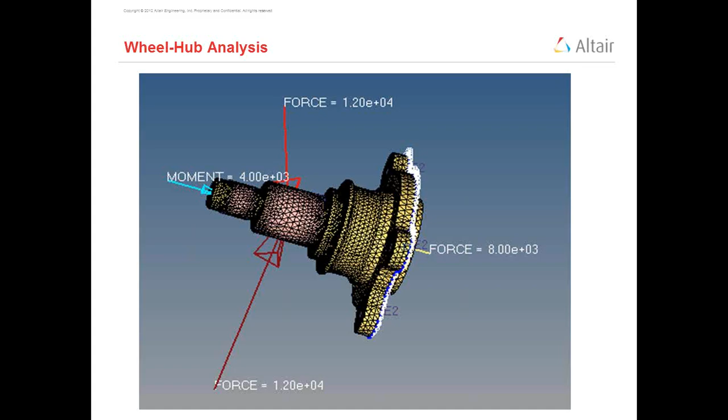We'll follow the same process as knuckle for the static analysis of the wheel hub. That is, first we create material, then property of the 3D elements, then we create a component collector and update it with the proper property, then we create load collectors as forces, torque and constraint, then we define the type of analysis. Here we'll use linear static.

So we'll start by opening the Hypermesh GUI from the start pull-down menu, all programs, select Hypermesh. This will open Hypermesh.

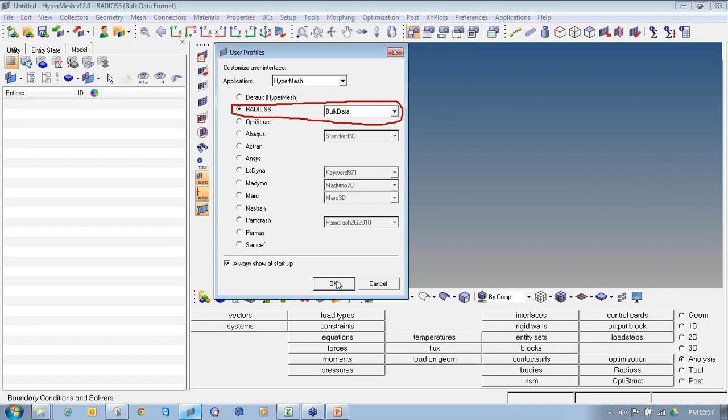Once you open Hypermesh, from the preferences pull-down menu, go to user profile and select the appropriate user profile to perform the static analysis. For the static analysis, always make sure you have selected RADIOSS bulk data to get the proper cards and properties, and click OK.

Then click on open folder. Before that, make sure on the top you've selected RADIOSS bulk data, so the proper bulk data format has been uploaded. Once that's done, click on open folder to open the file.

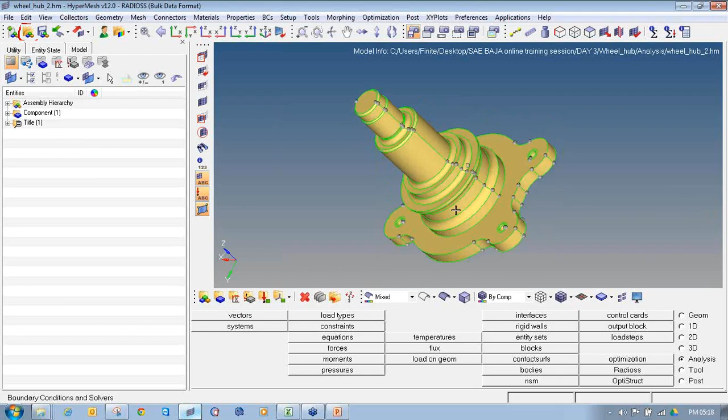From the model browser you can change the color also. So this is the wheel hub geometry.

First I will start with the geometry editing, as we have discussed earlier, so that it will automatically convert to a 3D mesh.

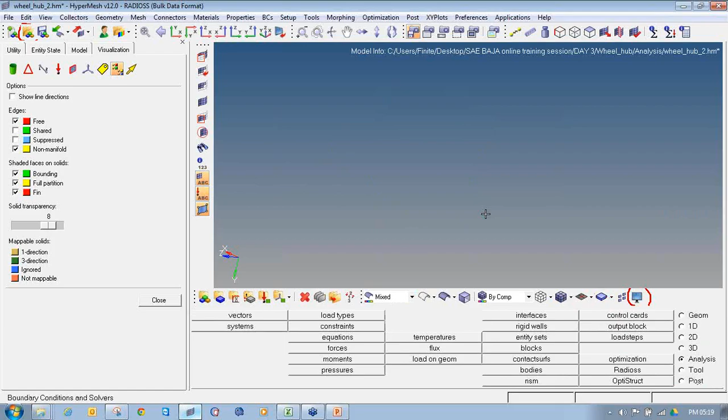Click on the visualization icon to enter the geometry editing panel. Then turn off the shared and suppressed edges and switch to line mode to check whether you have any free edges or non-manifold edges on your geometry. As you can see, I don't have any free or non-manifold edges on my geometry, so it's perfectly fine for meshing.

For the geometry editing, you can refer to the knuckle analysis model, which will help you with the geometry editing. The same way, you have to edit the geometry and remove the solids.

Either you can take a complete solid model or a surface model. If you are taking a surface model, it has to be an enclosed volume with all green or blue edges. If there is any T-connection, then yellow edges are okay; otherwise, you have to remove the yellow colored edges also.

Always make sure you do not set the geometry color to red, green, blue or yellow, because these are the colors used to indicate edge types. If you do, you won't be able to see the color coding of those edges. So if the geometry color is something like white, or if it's currently red, you can change it to a different color from the visualization panel. You don't have to keep it as one of these colors.

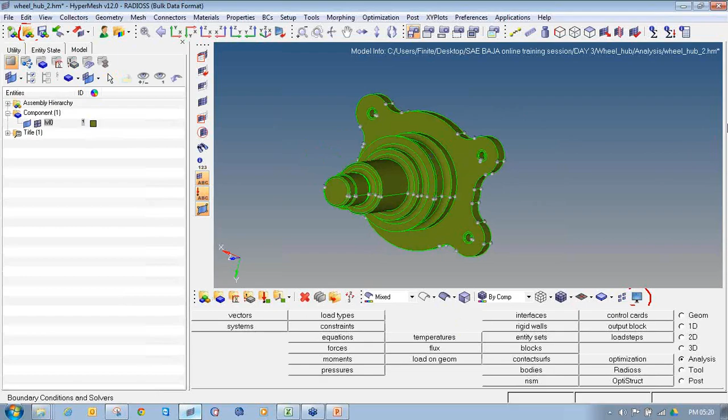Now I will enter the 3D tetramesh panel to generate a 3D tetra mesh for this wheel hub. So I'll go to 3D tetramesh and, in the tetramesh panel, select the volume tetra radio button.

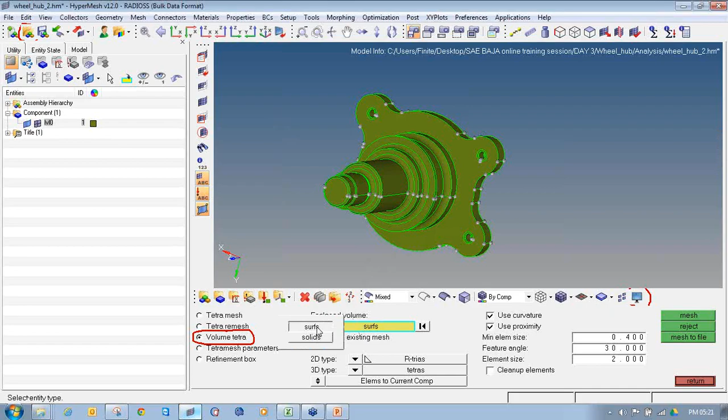In the enclosed volume option, select surfaces from the drop box. If your geometry is a completely enclosed volume, it will pick all the surfaces automatically, as you can see it has picked all the surfaces automatically.

Select the 2D type as trias, 3D type as tetra, and set elements to the current component. Right-click on this and make it the current component. You can also rename it if it's coming in as something like M0 due to CAD importing; since we have a wheel hub, I will rename it as wheel hub, and make sure that this is the current component.

Check the box for use curvature and use proximity, so it will capture all the fillets and sharp deviations of the surfaces and generate a good mesh pattern for the 3D elements.

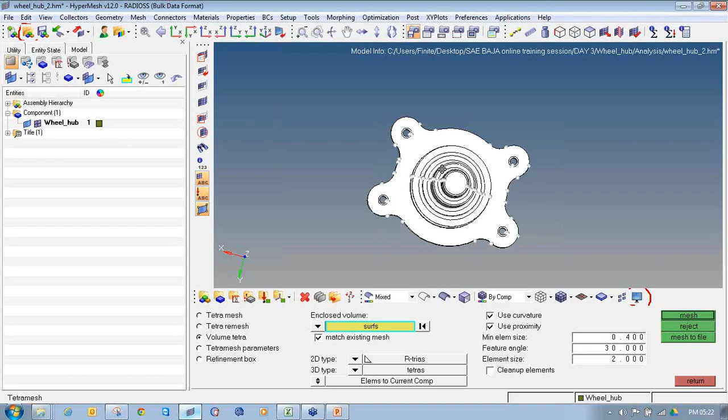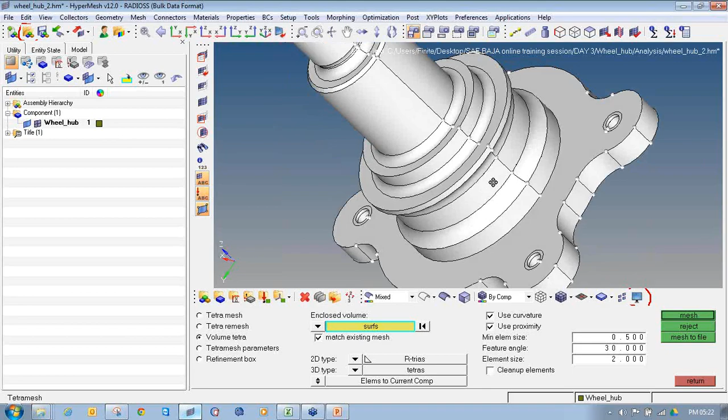Enter the minimum element size as 0.5 and average element size as 2, and enter the feature angle as 30. Feature angle stands for the angle between the normals of the two elements. It helps to create or capture curved regions of your geometry more accurately. Then click on mesh. Once you click on mesh, it will start the process. You can see on the bottom that it has started the mesh processing.

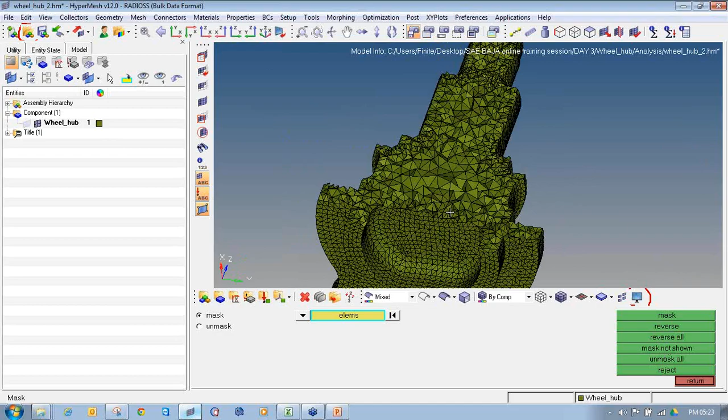So now you can see my wheel hub has been meshed by 3D elements. I will turn off the surfaces from the component, mask a portion of it and check how it meshes the wheel hub. You can see here it has meshed the wheel hub completely filled. If I click reverse, this is the second half portion. It has completely filled my wheel hub with 3D tetra elements. So I'll then click on unmask all.

Then my next step is to check the elements quality. I will click return to exit the tetra mesh panel, and click on the tools page and select check elements, or you can directly press F10 from your keyboard to enter the check elements panel. F10 is the shortcut for check elements.

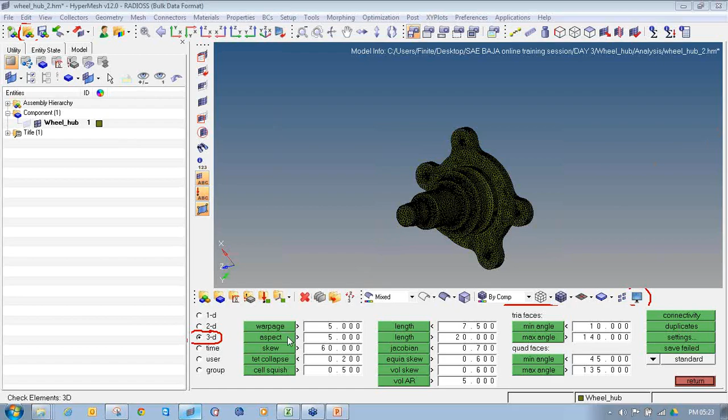Select the radio button as 3D because these are the 3D elements, so we'll check the elements quality for 3D. For 3D, we'll check aspect ratio first, so all the elements are passing on the aspect ratio. Then we check the TET collapse, and all the elements are passing the TET collapse value. Then we check the minimum angle, that my minimum angle should not be less than 10 degrees, so it is passing all the minimum angle criteria, and also it is passing the maximum angle criteria. So these 4 checks we generally have to apply for 3D tetra mesh.

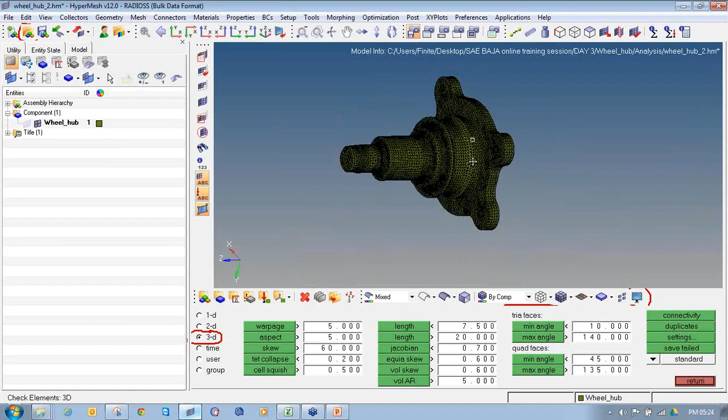Now as you can see, my meshing is perfectly done. So now I will move towards the MPCLL process to simulate this wheel hub. The first step in the MPCLL is to create the material. So to create material, I will click on material collector icon.

Enter the material name as steel. Select the color different from the component one, so that I can check whether my elements are assigned with proper material or not by elements color mode. Then select the type as isotropic, card image as mat1, and click on create edit. Enter the values of E, nu and rho, and then click on return. Again click on return to exit the material collector panel. On the model browser you can see my material has been created as steel.

Now in the MPCLL process, my next step is to create the property. So I will click on property collector icon to create the property. I will create a property for the wheel hub. Select the type as 3D, define a different color from component and material. Select the card image as PSOLID and define the material. Then click on create edit. As we don't have any other physical parameters to define for 3D elements, we'll click on return to exit the card edit panel, and again click return to exit the property collector panel.

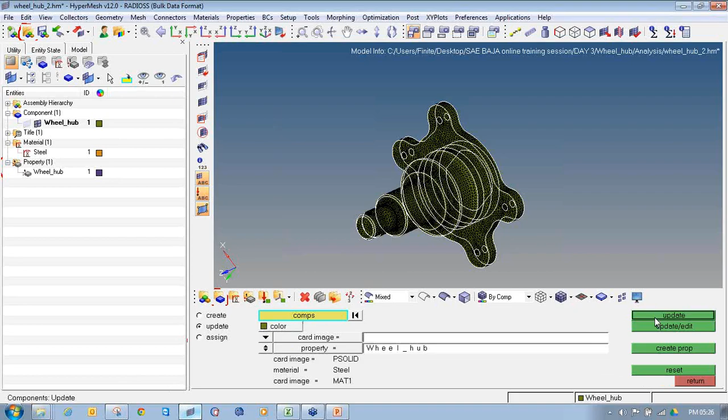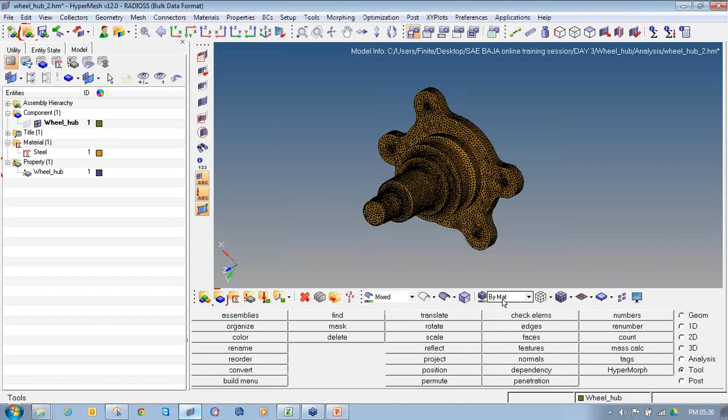Click on the components and select wheel hub and click on select. From the toggle window, I'll toggle it down to property and select the wheel hub property and click on update. Now I will cross check whether my elements have been assigned with proper property and material or not. From the elements color mode, I will select by property, so it should get a color of property, and if I click on by material, it should get a proper color of material. So now as it is showing the colors of material and property, my elements have got all the materials and property assigned. Now the next step is to apply the loads and boundary condition.

So we are going to constrain these 4 bolting locations, and the back plate on the backside we are going to constrain.

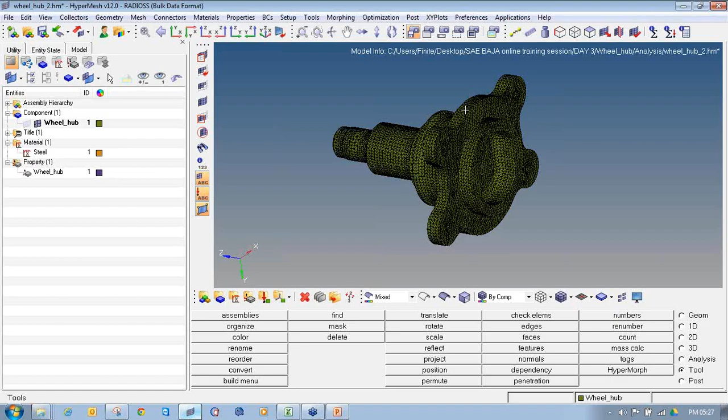Along with that, we are going to apply the forces in X, Y axis in this area, and we are going to apply a Z force. We are going to apply X and Y in this, and a Z force in this side. Also, we are going to apply some torque for this particular zone.

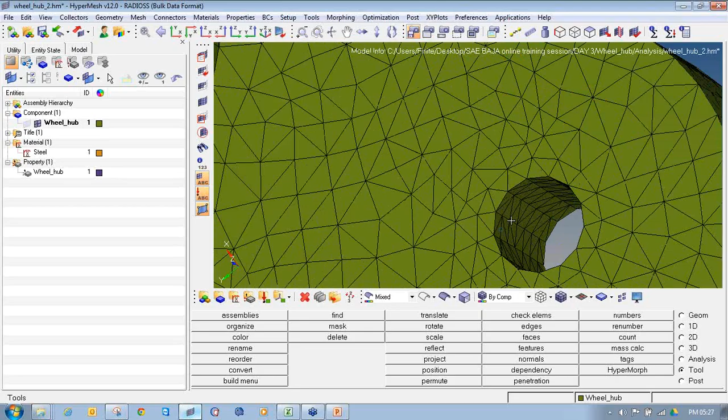There are 2-3 ways to apply the forces and constraint. First is to pick all the nodes and apply the constraint on each node, and if I want to apply the forces, I have to pick all the nodes and apply the forces on each of them. To update that will be tedious work.

So there is also one way that I can create rigid elements and then apply the forces and constraint at the center of the rigid, and it will get divided in equal amount to all the nodes connected through that center rigid element. Now I'll show you how to create rigid elements and how to apply the forces and constraint on those. First, I will create the rigid elements for these bolt locations.

To create rigid elements, I need a center of this cylindrical bolt location. To create a center of this, I will go to F4 or geometry distance. F4 is the shortkey of the distance panel. Select the 3 nodes panel, click on the nodes on the circumference, and click on circle center.

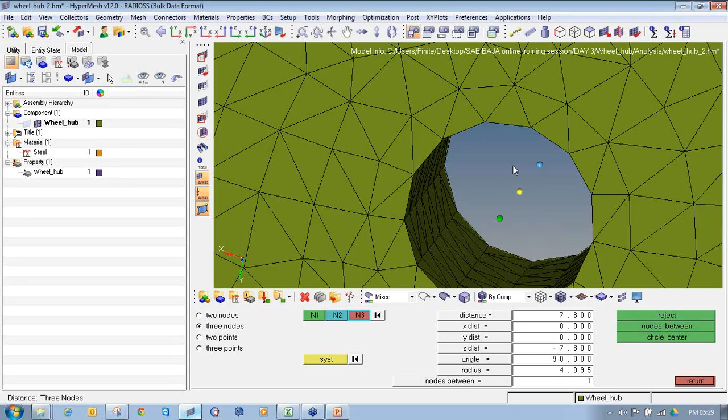Similarly, I will select the 3 nodes at the other circle. So it will create 2 circle centers, and the center of these 2 points will be my center of this particular cylinder. I will do the same process for this area.

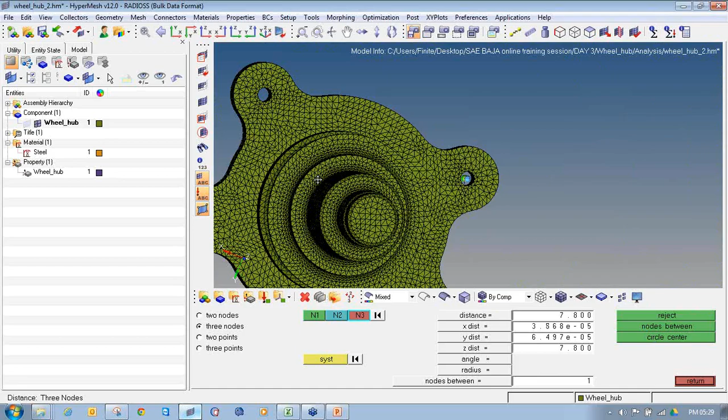So I will create a circle center for this. Similarly, arbitrary, you have to select any 3 nodes and create a circle center. Then deselect it and select N1 as this and N2 as this, and click on the nodes between. Again, pick these 3 arbitrary nodes at the circumference, click on circle center.

Similarly, select the 3 nodes and say circle center. Pick the node N1 and N2 and click on nodes between. So in this way it has created a node in between this. Similarly, for the 4th one, I will again do the same, selecting any 3 arbitrary nodes.

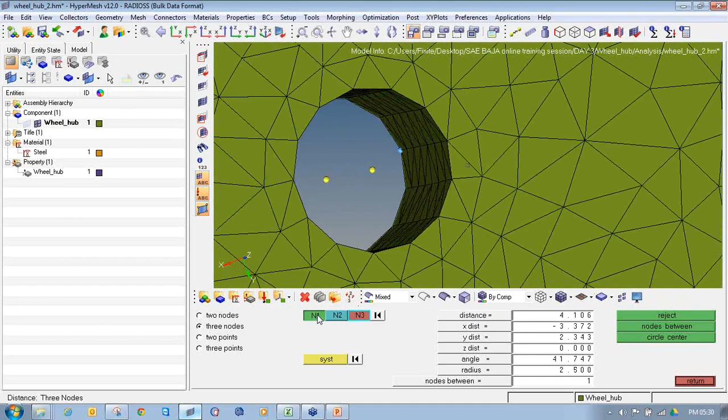From here also I will select any arbitrary 3 nodes and say circle center. Then from these 2 nodes I will click on nodes between.

So now I have created a center node, but there are few more nodes, as you can see. On each bolt location you can see there are 3 nodes, but I only require the center one. So to lower down my confusion level, I can remove those.

Press Shift F2 from your keyboard or go to geometry temporary nodes. Shift F2 is the shortkey for geometry temporary nodes. Select the 2 nodes which you don't require, keeping the center node as it is, and click on clear. It will keep only the center node and remove all the other nodes, so the confusion will not be there.

So you have to create rigids from this node which connects to the inner surface of this bolt.

Now, as I told you, we are going to apply the forces in this location and moment in this location. So the same way we have to generate the center of this and the center of the second one, and then find the center point of it.

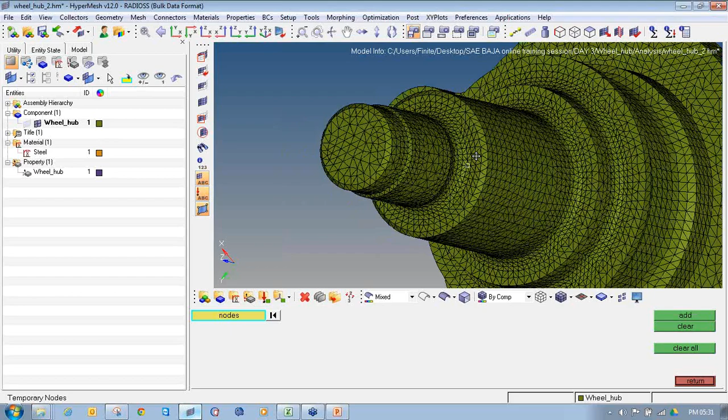But as we have a 3D mesh, we cannot go and see the hollow structure of it. So there is one more way to find the hollow structure and apply the forces on that structure and find the center. That I'll show you.

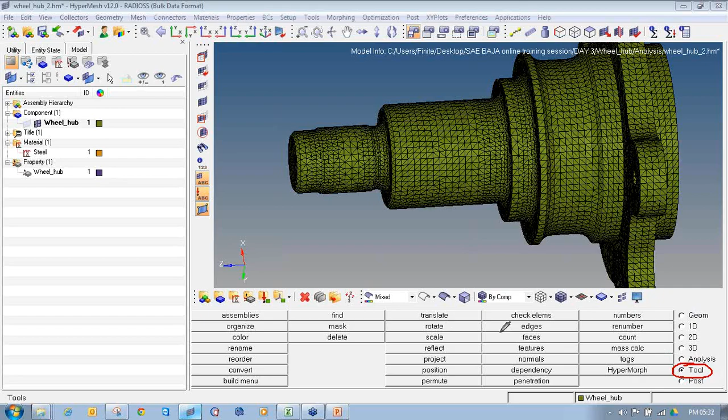For that, go to tools. On the tools page, select faces. Select the component for which you want to create the faces, and click on find face, so it will create a face of this.

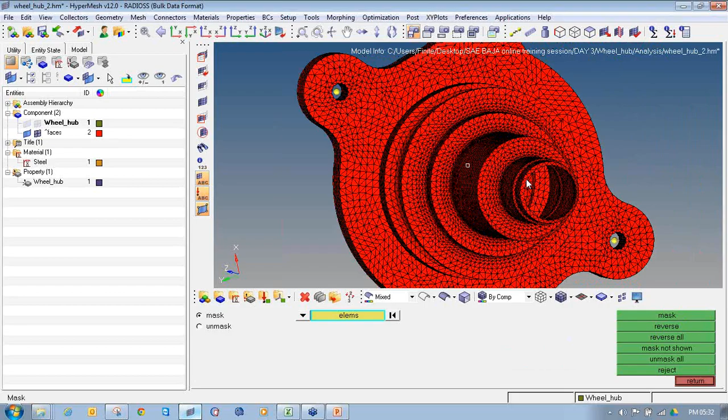The face will be the outside mesh, that is, if I mask any one, you can see it is a hollow structure. If I mask a big portion of it, you can see it is a hollow structure. If I just change the color, as you can see, this is the hollow structure.

So I'll say unmask all. Then, as I'm going to apply the forces in this location, I will mask this.

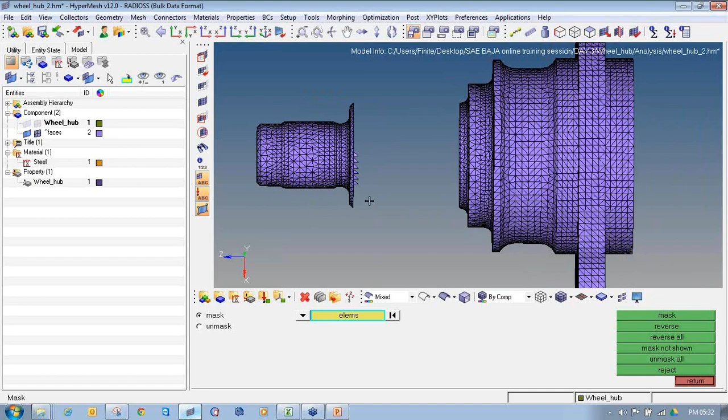Similarly, I will mask this portion and delete the rest because I don't require these elements. So now if I turn this on, these are exactly over these two, and these are hollow also, so that I can find the center of this circular cylindrical portion and apply the forces.

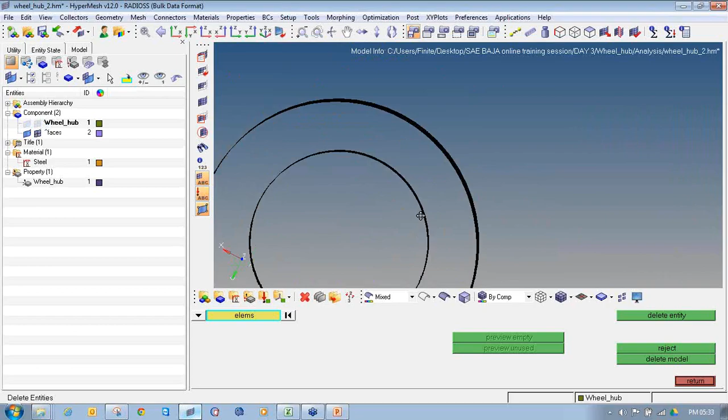For this 2D mesh, as it is 2D elements, I also require to define a property and material so that it will simulate during the analysis. But if I give a bigger thickness, the geometry will get distorted. So I will rename it, say connection. I will click rename and say connection.

So for this, first I will create the material and property. I will use the same material, but create a different property. I will click return to exit those panels and go to the property collector icon. Create a property as connection.

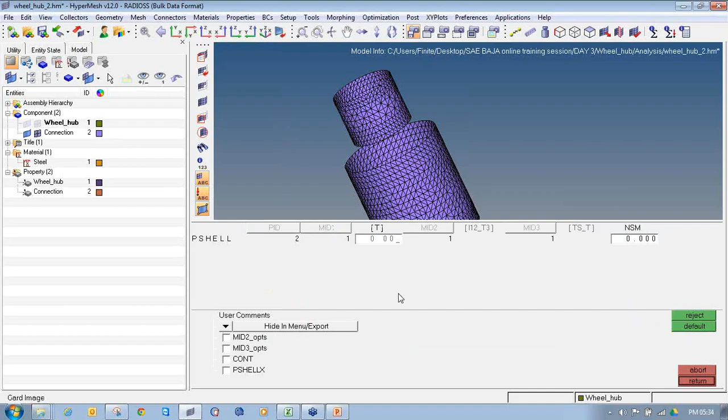As these are 2D elements, I will select element type as 2D, card image as PSHELL, give the same material, and click on create edit. This time I will give a very minimum thickness so the geometry will not get distorted.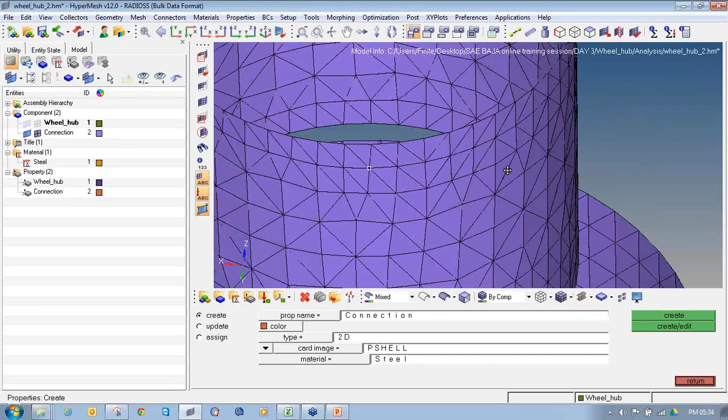Then go to components, select the component, and update the component with proper property. If you convert this into 3D, you can see there is no much difference in the 3D geometry. My property is assigned on this, but there is no change because the thickness is very less. So if I change it to line mesh and 3D, there is no change in thickness. It's just the shell mesh to create the connections.

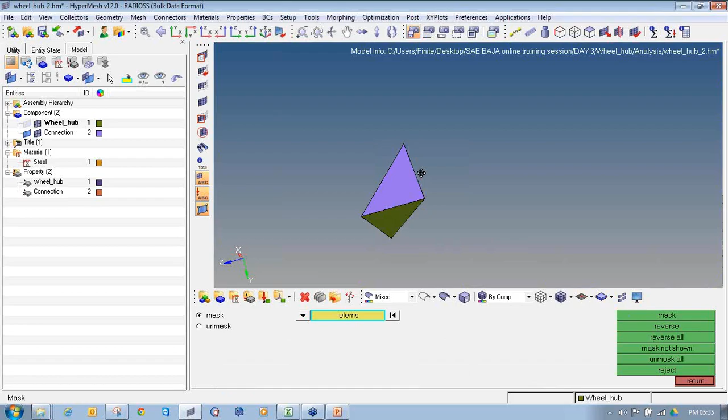Now I will create center nodes using these two cylinders and apply the forces on the nodes. As they have common nodes for each and every element, I will show you. If I mask this and this, say reverse, you can see this 2D shell element is exactly lying on this tetra element, sharing the same nodes.

So if I apply the forces on this 2D element, that will be transferred to the 3D element also. In the same way it gets transferred down, for anyone you can check it. So they are sharing the same nodes of 3D and 2D.

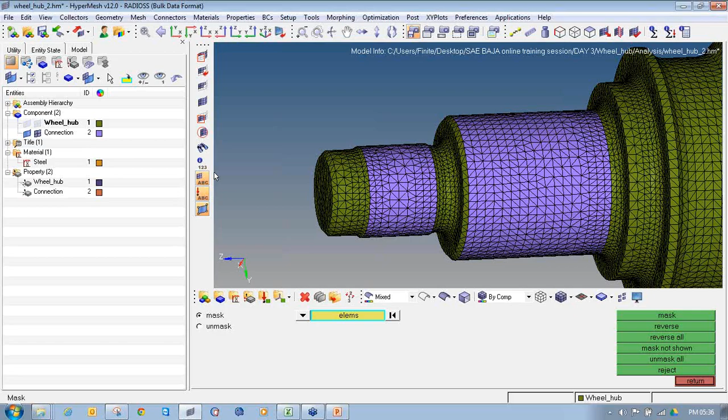Now I'll apply the forces, or create the rigid connections for these shell elements, and similarly it will get transferred to the 3D mesh. So I will turn this off, go to return, then again press F4 from my keyboard.

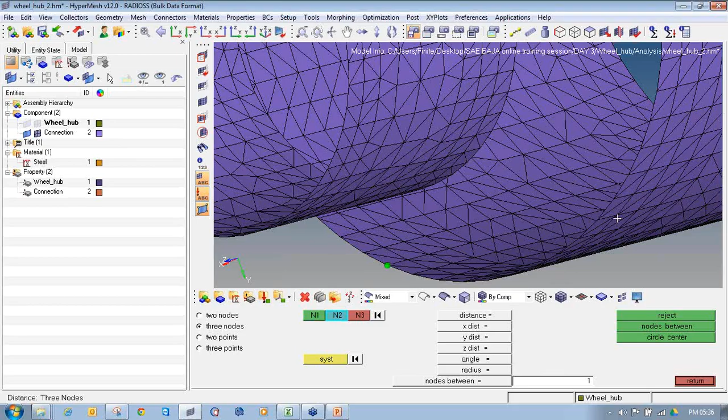From the 3 nodes, I will first find the center of this circular region, similarly for the bottom one, then with this I will create a node between. Again go to F4 and pick the circle center, picking any 3 arbitrary nodes.

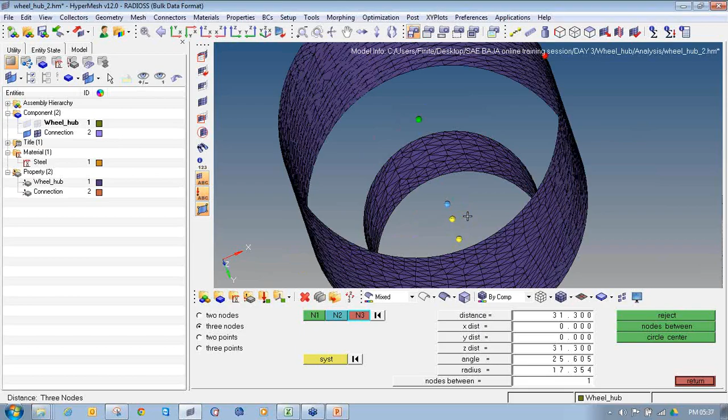Similarly on this side, another side. And then picking these 2 nodes and say node between. So in this way I have created the nodes.

Again I will do the same. I will remove these 2 nodes by going to Shift F2, picking these 2 nodes and keeping only the center nodes for the rigids and to create the rigids.

So now you can see, if I turn this on, these are the center nodes for the bolting location, and these are the center nodes. So now I will create rigids to connect the center nodes to each and every node of this 2D mesh, also with the wheel hub. First I will create the rigids for this 2D mesh.

Rigids are only used to transfer the forces, so we will not provide any material and property for it. They are used just for the connection or transferring the loads. But as they are elements, we have to create a new component for it, so that the material and properties of the wheel hub elements or the connection element will not get transferred to the rigid elements.

So I will go to component collector, enter the name as rigids, give it a different color, and without giving any property I will click on create. Make sure there is no property assigned to rigid. So now you can see in the model browser component, a rigid component is created. Now to apply rigids or create rigids for your model, go to the 1D page, where you will find the rigids panel.

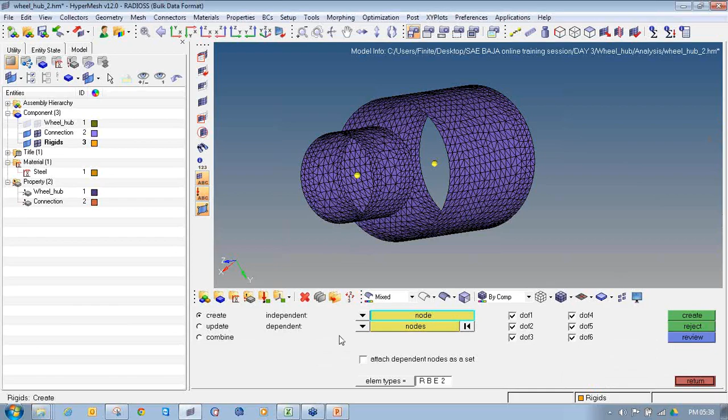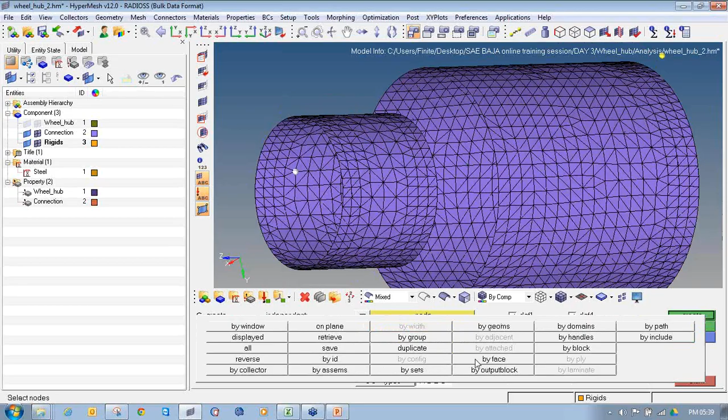In 1D page, select the rigids panel and make sure all 6 degrees of freedom are on. Select the independent node as the center node, and in the dependent field select multiple nodes. Pick any node at the circumference or area of the cylindrical face and click on nodes by face, so it will pick all the nodes on the face. Click on create, and it will create a rigid spider for it. So if I apply any force, torque, or constraint, it will get transferred to all the connecting nodes.

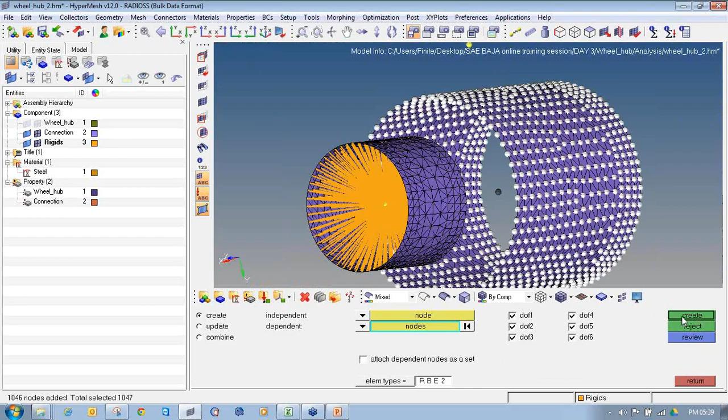Similarly, I will pick this node, pick any one node on this, say nodes by face, and create. So in this way it has created 2 rigid structures, one for this cylinder, one for this cylinder. Now I open the wheel hub.

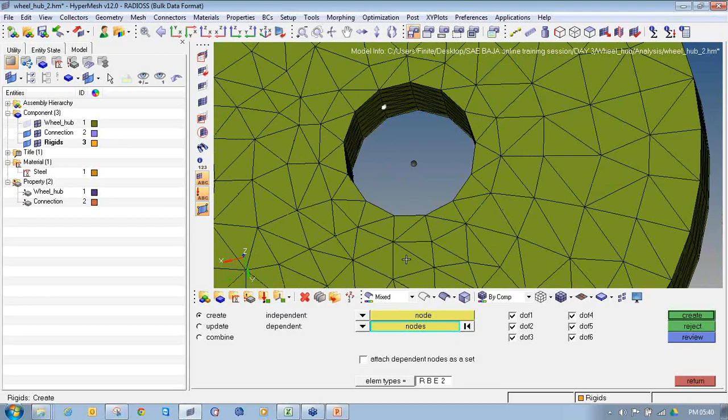Similarly I will pick this node, pick a node on any of the circumference and say node by face, so it will create this node as rigid. Similarly for this node, nodes by face, create, so it has created the rigid mesh. Similarly for this node, nodes by face, so it has created this one also. And for this node, pick this node and by face, so we have created the entire rigid structure of this meshing. This is the entire rigid connection where I am going to apply the forces and constraints.

Now once my forces and constraint rigids are done, my next step is to apply the forces and constraints on my model. I will start with applying constraint. To apply constraint, first I need to create a load collector for constraint. I will create a load collector named SPC, giving no card image because we are going to apply the constraint, and giving a proper color, then click create. So on the model browser you can see my load collector SPC constraint has been created.

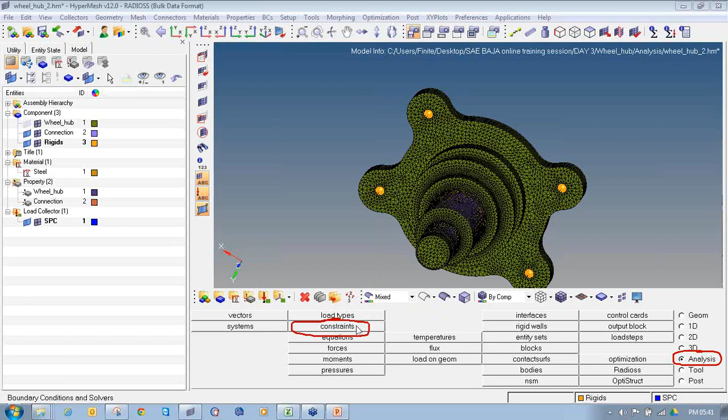To apply constraint on your model, go to analysis, constraint panel. In the analysis page you will find the constraint panel in the second row, second column. Select the node on which you want to apply the constraint. I want to apply constraints on all the center nodes, so I will pick them one by one. You can cross check whether the center nodes are picked by turning it off, and you can see all these 4 nodes have been picked.

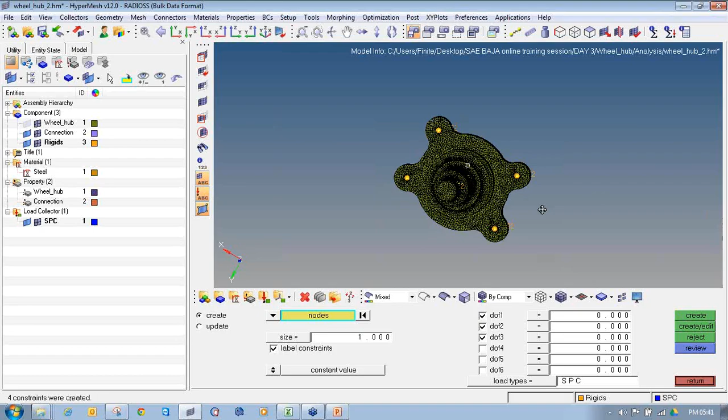Then I'll only apply the constraint for degrees of freedom 1, 2, 3 because the 3D element doesn't support rotational degrees of freedom, only translational degrees of freedom. So I will click on create, and now you can see my constraint. If I toggle these off again, you can see my constraint has been created. You can also maximize the size by changing it.

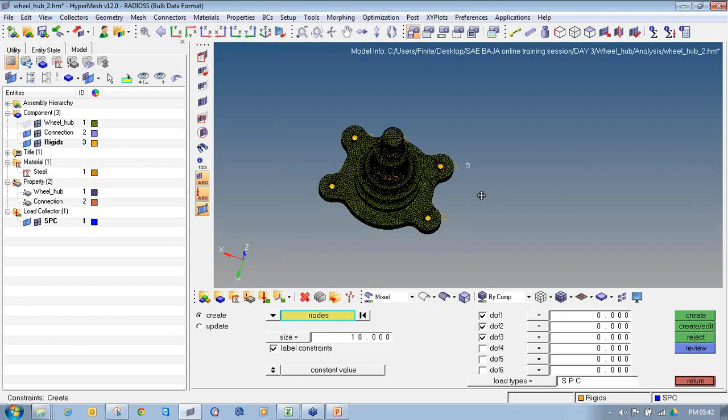So now again I will turn this on. My next step is to apply the forces on my model and apply the torque on my model. First I will apply the torque. Earlier people used to apply torque by creating a bar of some length from the center and applying force on that, so it would behave like a torque. But in Hypermesh you have a direct panel to apply torque as moment. So I will turn off this meshing and also off these rigids. On this I am going to apply a negative Z direction torque, around 2g.

To apply the torque, first I need to create a load collector for torque. I will go to the load collector panel and create a load collector named torque, defining a different color so I can easily view it. Click on create, and once you click create, you can see the torque has been defined on the load collector.

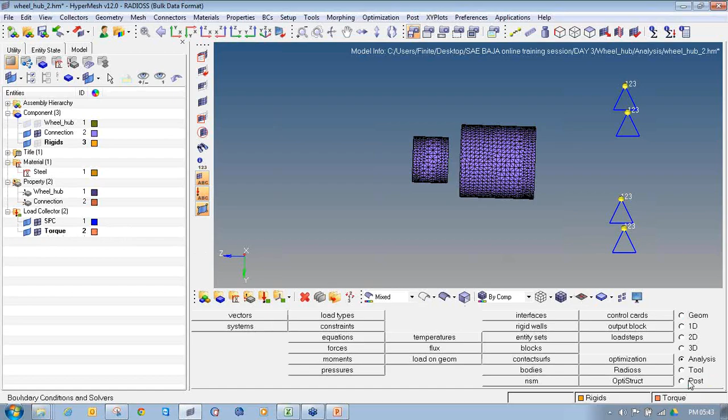Then to apply the torque on your model, go to analysis. In analysis you will find the moment panel through which you can apply torque on your model. As I told you, we are going to apply somewhere around 2g force on the wheel hub. If we consider my vehicle to be 400 kg, then 1g will be around 4000 Newton and 2g will be around 8000 Newton. This will be shared by all 4 wheels, so for one wheel it will come around 2000. So I will put 2000 here.

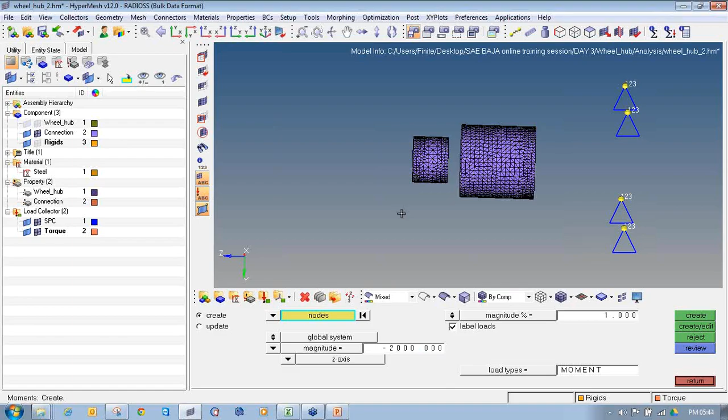And pick this node and click on create. I can also increase the size, so you can see my moment of 2g has been applied on this particular wheel hub.

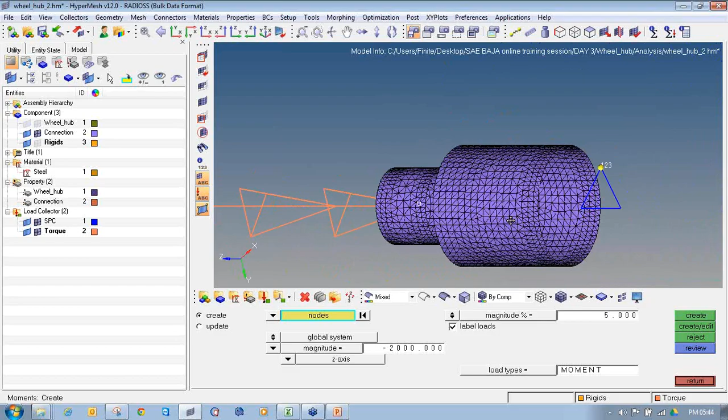Then my next step is to apply the forces on the X, Y, Z axis. In X and Y I am going to apply a 3g force, and in Z I am going to apply a 2g force. For that I will create load collectors in the same way: create force X, create force Y giving a different color, create, and force Z. Now I'll turn off this meshing and apply the forces on this particular node, and it will get transferred to the outer surface. So to apply forces on your model, go to analysis, force panel.

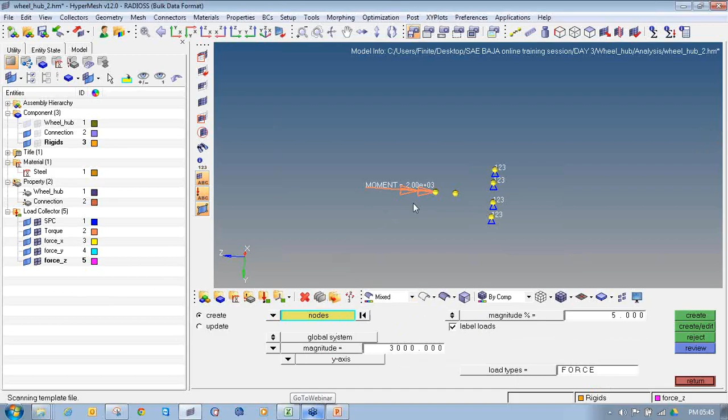As I told you, we are going to apply a 2g force on this z-axis. First of all, make sure the force Z is current. As it is bold, it is current. Select the node on which you want to apply the force.

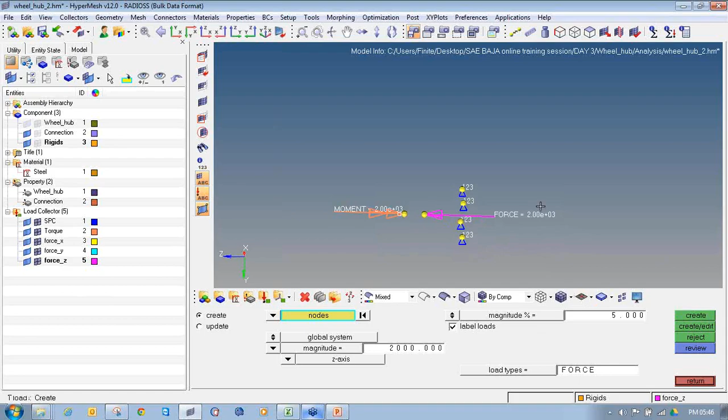I am going to apply the force in the positive z direction of around 2g. So similar calculation, if we consider 400 kg of my weight, 1g will be 4000, 2g will be 8000, and divided by 4 wheels, so one wheel share is around 2000. I will apply here as 2000 and click on create. It will create a force of 2000 in the z direction.

Similarly for X, make it current. For X, we are going to apply a 3G loading. 3G stands for 12,000 Newton of force, so for one wheel it will come across around 3,000 magnitude. Select the axis as X, select the node on which you want to apply the force, and click on create.

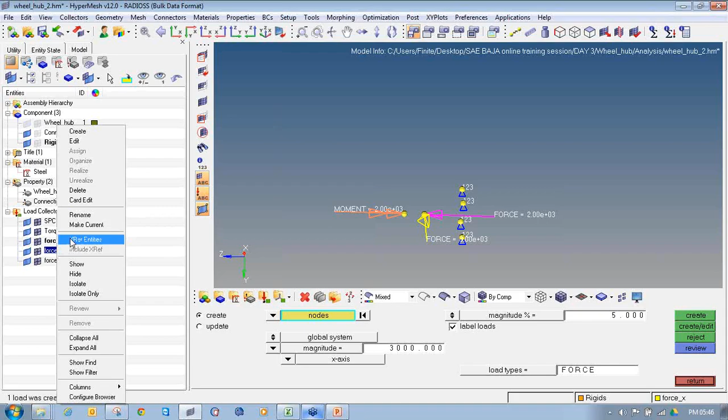Similarly for force Y, click on make current. Select the axis as Y. For the Y axis also, we are going to apply the same force and click on create. So in this way you can see all the forces and constraints have been applied on my model.

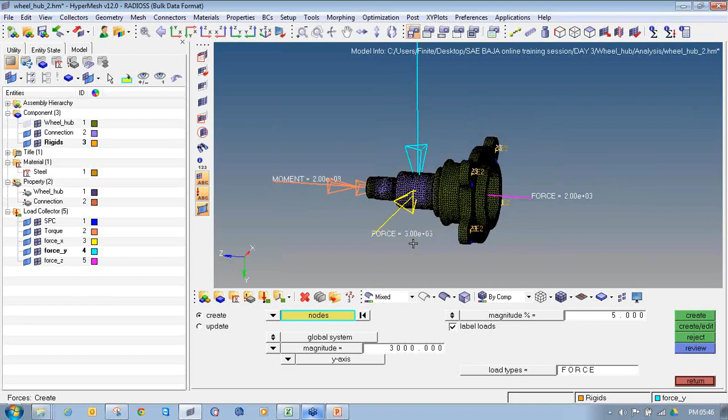So now you can see this. In the XYZ direction, the forces and moment have been applied on my model.

To solve this, we can have different load cases, like either force X and torque are acting at the same time, or there is no torque, or all three forces are acting at the same time, or maybe two of the forces along with the torque are acting at the same time.

Now I will show you how to combine, or how to apply the combined loading in Hypermesh and how to simulate that. To show how to apply the combined loading, I will take some examples.

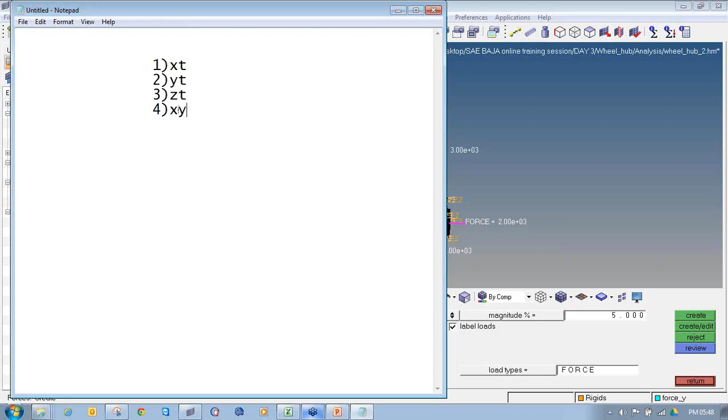We will apply first force X and torque acting at the same time, then we will apply force Y and torque acting at the same time, then force Z and torque acting at the same time. Then fourth, we consider X, Y, Z all the forces plus torque acting at the same time.

Then the fifth case we can consider as X, Y and torque acting at the same time. Sixth, we can consider X, Z and torque acting at the same time. Or seventh way, we can consider Y and Z and torque acting at the same time. In this similar way you can perform so many different combinations of loads.

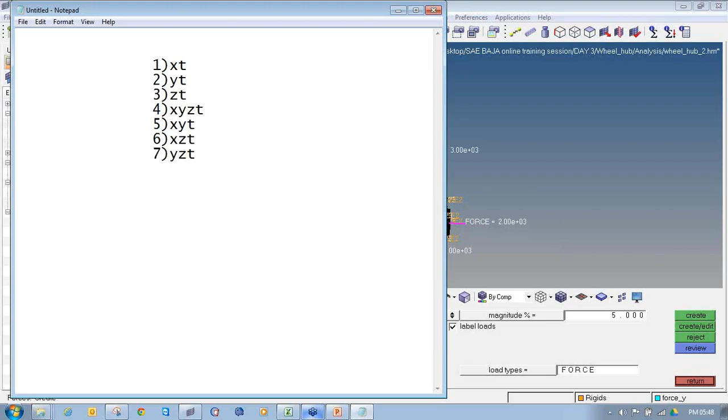I am just picking some of them to show you how to perform the combined loading, or how to apply combined loads in Hypermesh and simulate them. I will pick only these 7 and show you the procedure. First, click return to exit the force panel.

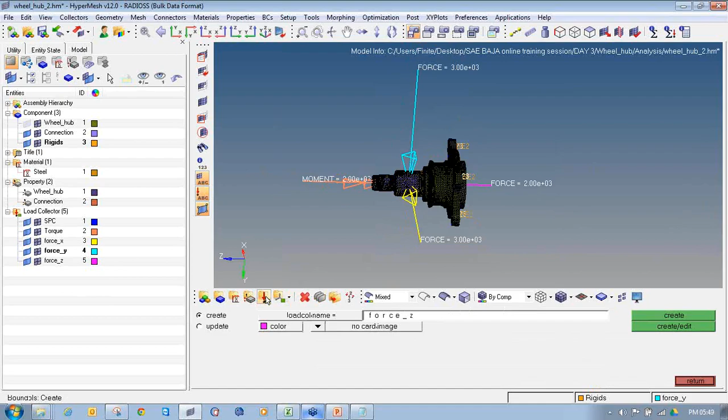To apply the combined loading, you have to create the combined load collectors. To create the combined load collector, go to the load collector icon. My first case is to apply the X and torque combined loading, so I will enter it as combine XT. Give it a card image as load, which helps us to combine the two loads, and then click on create edit.

Enter the load number set as 2 because we are going to combine two loads. Enter S as the scale factor 1, same for the first loading enter 1 and second for 1, so it will multiply this with 1 and apply the forces. If you want to magnify any one force, you can input the value of scale factor, so it will multiply that particular force with that value and apply accordingly. I don't want to do this in this model, so I will apply this first torque and force X.

Then I will apply Y and torque. I will click on create edit, again put 2, S1 1, S1 2, torque and force Y. Similarly for Z, again 2, this one is 1, this one is 1, first as torque, this one as force Z.

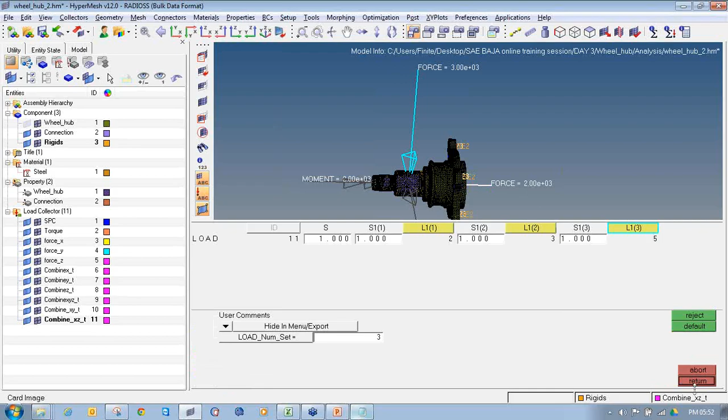Similarly for the second, if I take XZT, click on create edit, enter here as 3, S1 values all as 1, then torque X and force Z. In this way it will create XZT.

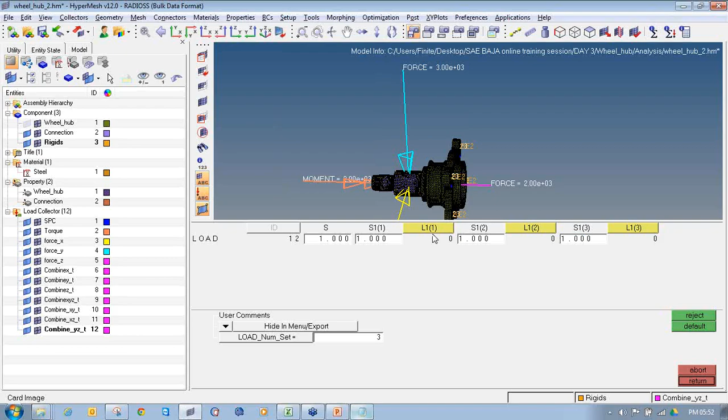Then my last will be YZT. I will enter Y, Z and T. Click on create edit, enter 3 values: 1, 1, and 1. Select the torque, Y force, and Z force.

In this way I have defined the different load cases. These are the different load collectors I am going to apply on this model.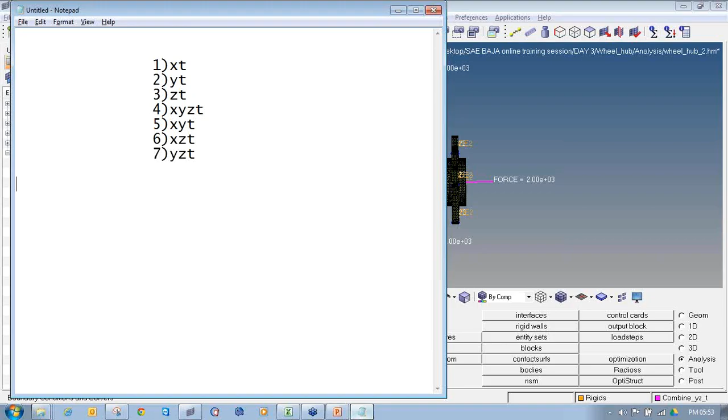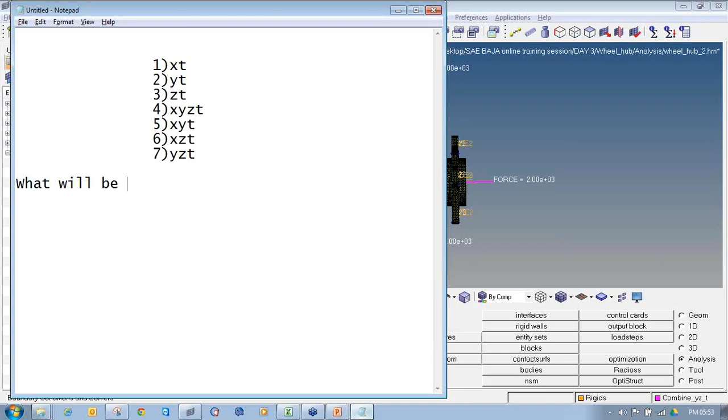Now we want to see the results, what will be the stresses and displacement due to, first, X force...

Second Y force, third Z force, fourth torque, fifth combine X and torque, sixth will be combine Y and torque, seventh will be...

Combine Z and torque, eighth will be combine X, Y, Z and torque, ninth will be combine X, Y and torque, 10th will be combine X, Z and torque, and 11th case will be combine Y, Z and torque.

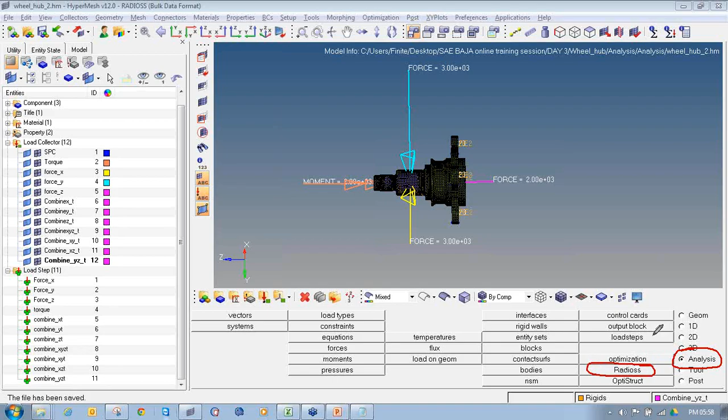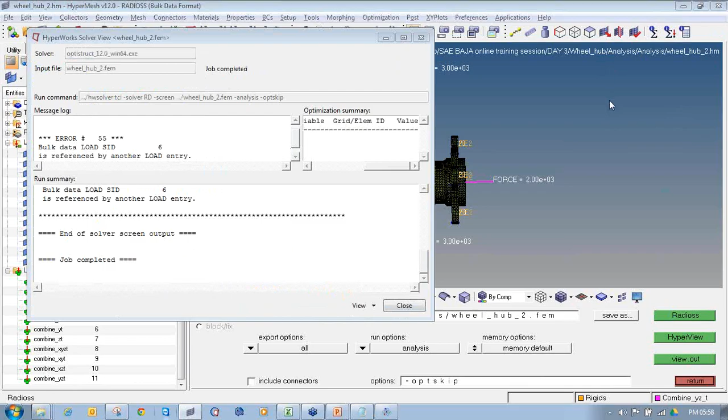Then I'll go to Radioss, Analysis, Radioss, to run this problem. Select the export option to all, run option to analysis, memory option to default, and click on Radioss to start the solver process. So it will start the solver window.

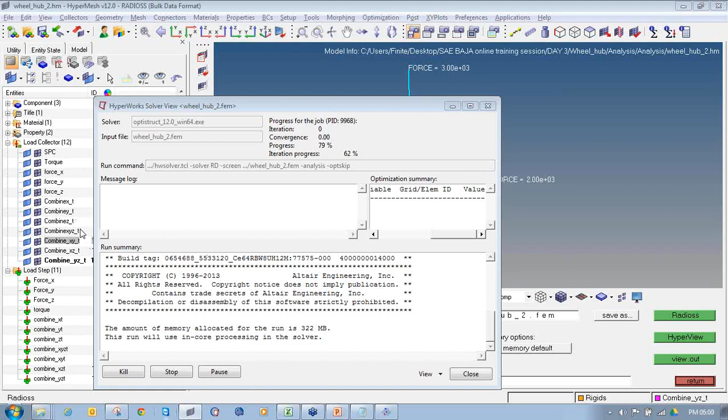While it's running, I'll give a suggestion: don't apply the combined loading by taking the reference of another one, as I have done here. Always try to go with the baseline process. For example, in the load case xyt, I took the value from combine xt and applied the y force with it - don't do that. Always, if you want to apply 3 load cases, pick the 3 forces as force x, y and z separately and then apply it. The results will not be different, but if you find errors, it will be quite difficult to sort those out. So it's always better to apply the forces in a separate way.

Once you can see my analysis has got completed, the message will appear, then click on results to view the results in Hyperview.

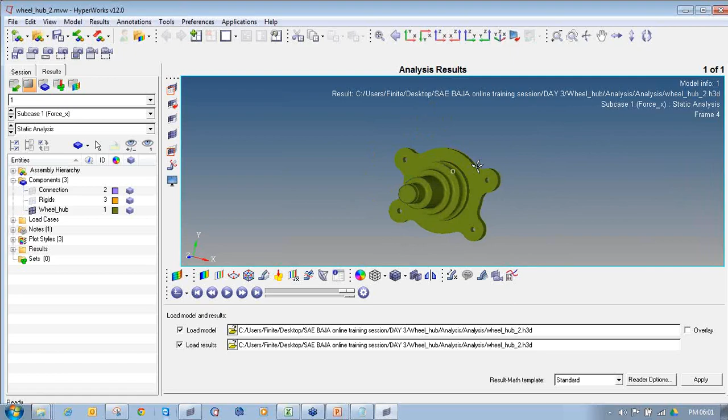So this is the wheel hub. On the model browser, I will turn off this rigid and connections. So this is my wheel hub, where we want to see the values of stresses and deflection. Go to contour, select the result type as displacement. This is the value of displacement, and these are the values of stresses.

I will click on measures to check the maximum and minimum value of the stresses. So maximum stress is coming as at this location, node number 4229, and the maximum value is coming as 53.811 Newton per mm square.

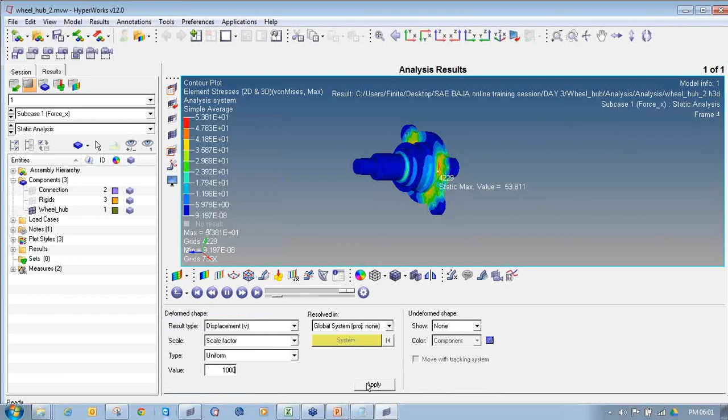Also I will turn on this animation plot, and as the displacement is very less, I will magnify it to deform. Click on deform and magnify the scale value to view the displacement more accurately. So due to the X forces, you can see the deformation will be something like this.

Then if you change it from here, you can see all these sub cases will be there - 1, 2, 3, 4, 5, 6, 7, 8, 9, 10. That is force X, Y, Z, then torque, then combine XT, combine YT, combine ZT, that is combination of x, y, z and t, combine x,y,t and combine y,z,t and combine x,z,t.

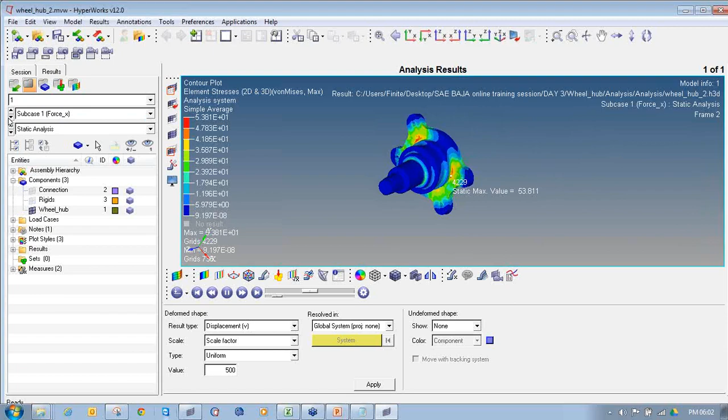So I will click on this drop box to pick the second one. This is due to y force. This one is due to z force, as you can see. Then this is due to the torque.

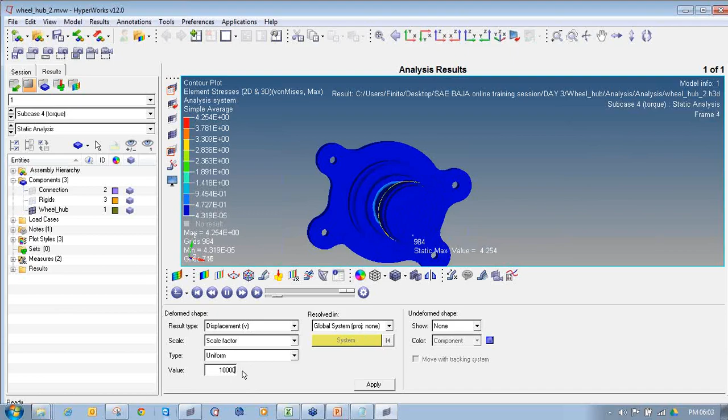As the displacement is very less, you can also magnify it a little more to view the deformation. So you can see due to the torque it will behave something like trying to twist this. I have applied this in the z-axis, so it is twisting about z-axis, as you can see. But the value is very less, that's why the displacement and stress is very less. So you can magnify that and then check the values.

Then for the next load case, when torque and force x are applied at the same time, then force y and torque applied at the same time, then force z and torque applied at the same time. Then this is the case where all three forces are applied at the same time, that is x, y, z plus torque. So the stress value is 137.950 Newton per mm square.

Then these are some more cases, that is x, y and t. This is for x, z and t, so this is the failure location. This is the maximum stress value for y, z and t.

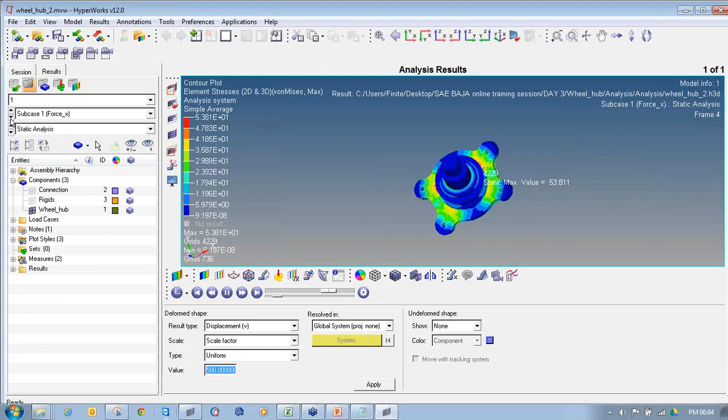So in this way you can check different load cases and different analyses in a single file by solving it. It will not only save your time, but also help you get a better iterative model and a better analysis. So always go through the different load cases in the same file and solve it once to get all the results. You can apply this in a similar way or a different one. In this way you can solve the wheel hub analysis, changing different forces and different combinations of forces on the wheel hub.

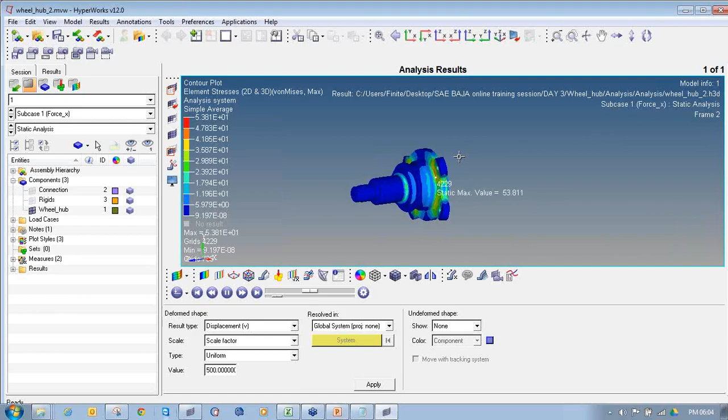So in this tutorial I have covered how to create a 3D mesh of the wheel hub, then how to apply the forces and how to apply the combined loadings, that is combination of some forces like 2, 3 and 4. If you want to increase the combination of forces, you can apply 5, 6, 7, however many forces you want to combine, and then you can view the results in Hyperview in this way. So in this way I have ended this tutorial.